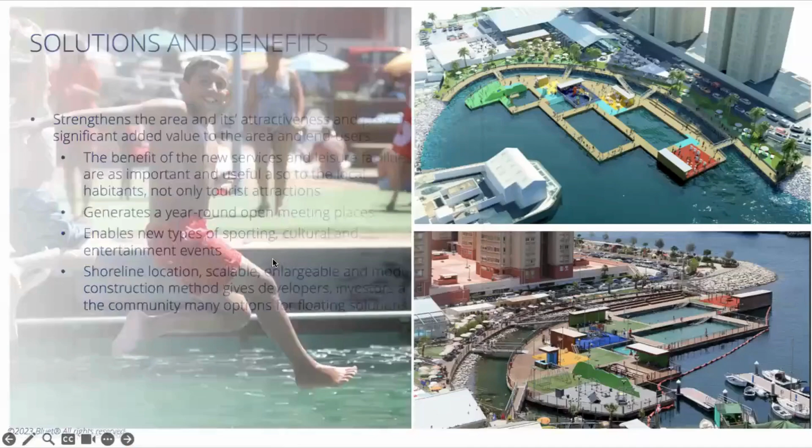Then I'm just going to show you some slides of what we have, what you can do with these floating solutions. So we have these before and after pictures of some of the cases, and also a good example of why we are actually doing this. This is where we actually started from.

This is a case from Gibraltar - a floating pavilion which Marine Tech already did in 2013 and 2014. There was a very bad, rocky shoreline which was pretty much dangerous for swimming. Nowadays it was created into a floating swimming arena with outdoor gyms and everything. This created a safe swimming spot, but also a new leisure facility for people and tourists, and you can see the happy face of a swimmer, a user. So this is a good example of a totally new kind of waterfront with a floating solution.

This is also a case in Finland, in Helsinki, next to one of the busiest harbors in the Nordic areas, probably one of the busiest also in Europe. There's also going to be a housing area, already a new development area, with a lot of housing coming, and then a multi-use concept on land, like 5,000 square meters of hotels and offices. We're also going to build a floating spa here with pools, restaurants and saunas on the waterfront, with a beach which the city is building over there.

And this is the same thing, not enough space on land to build this. Not an urban area, but a really good example of how it can be changed.

This is a project in Iceland. On the top right, you can see a very silent, natural-based location with a small inland lake. And this is what it changed to. They have a spa building on land, and then two thermal floating pools on the water. Totally different experience than just the traditional spa on land, but this has brought a totally unique spot to this area as well.

Then one of our latest projects, Lake Como, what we did over here was replace the old pool. They had an old floating pool over there, and now we have replaced it with a new one. This is the largest floating infinity pool in the whole world.

So you can also see what could have been done, and also the same thing could not have been done on the land at all, because they have a spa beneath the land, like in the basement. So there is no space on land to build this, and that is also a definite reason why it has been built on water.

So just to give you some examples of what we can do with these floating solutions. Then, why are we talking about this? So now touching a little bit on what Bluet does - we are a company who concentrates only and 100% on floating construction, and like Stefan said, we have been founded in 2016. We have our own product concepts, which are floating pools and floating infrastructure, and that's actually how we expanded from the floating pool also to the spa and wellness solution. We don't do anything else, we do the floating construction.

That's why we are so uniquely specified to this construction. And here's, for example, the Helsinki Allas. It's not just about the pools - there's also 1,600 square meters on land. There's the infrastructure part, and we have several infrastructure solutions we deliver, always designed project-specific.

We also bring everything we bring to the land, we bring to the water. So it's not just about the pontoon, it's also all the infra needs - water, sewages, electricity, anchoring. And the foundation is something you should never skip, because when you have a good foundation, then you have a good project and a safe and sound house on water.

And on the right you have a good example of a combination - there's the pools, the infrastructure with a restaurant, saunas, spa, and a wellness concept. So we actually bring everything together in one with our collaborators.

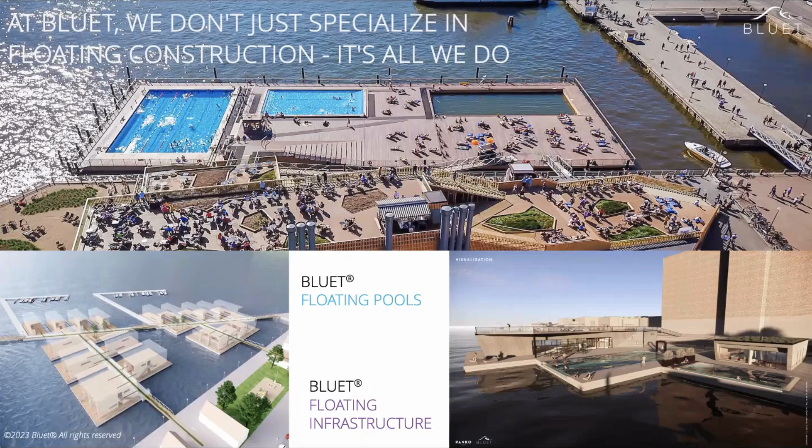One important thing to mention is that we're not a company who builds the buildings, because there are several companies who can do that. This is how we collaborate with other companies - we don't compete with the architects, we don't compete with the real estate developers, nor MEP designers or project managers, nor house manufacturers. We collaborate with them because there's so much knowledge in the world that we don't have to invent the wheel again. So we bring our niche knowledge to these areas and collaborate with several different kinds of companies around the world.

And if there are any questions in between and you want to stop me for a while, just let me know.

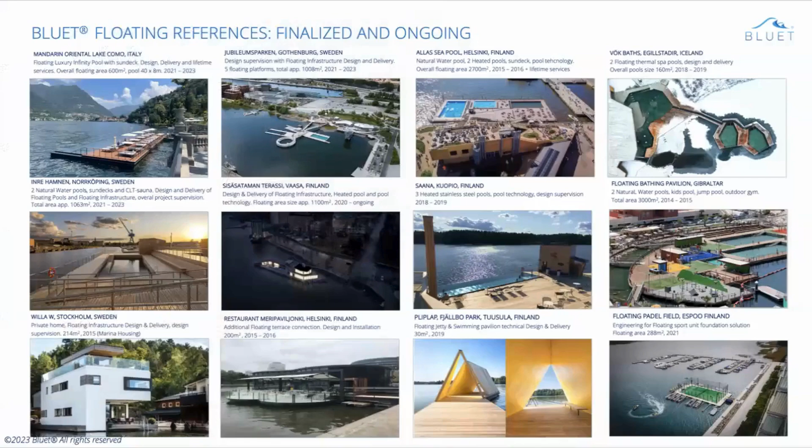Here's some of the references. And like I said before, we are a company who designs and delivers our own products, so basically we run the whole project. We can design and engineer the whole project from beginning to end, from the zero level below. So like I said, we're not building the houses, but we supervise the house designs. We work with the local designers, local architects, local technical designers to bring our own niche know-how to the project.

Here's some of the pool projects, housing projects, floating decks, floating sports fields. Our main areas we have worked on are the Nordic countries and Europe, but we now also have projects coming up from the US area, starting projects from the Middle East. So we are expanding, and hopefully soon also having projects in Singapore too.

Wonderful. May I actually interrupt you, as you mentioned, because we have 3 questions in chat. I will quickly read the first one - I mean, you can also read if you want to. What are typically the points of friction with decision makers to install floating structures? How do you convince the decision makers and overcome these?

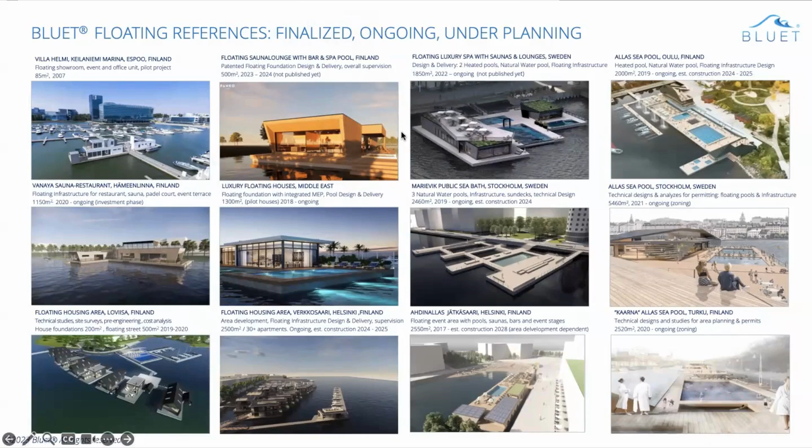Some more references over here, maybe also about the spa projects. We have spa projects, like I said, where the pool is just one part of the overall solution. For example, these Swedish projects here, we have 3 pools, but the main thing is that we are also working with the spas - there's a spa, a sauna lounge, a private sauna, and a hotel on the shoreline. This is a company called Bongo we work with on these spa solutions. Just wanted to show you these multiple options.

This is a public pool project in Sweden. One key issue here is not just the new structures of the pools, but we also used an old pool - we renovated and reused it. So that's something we can also do.

The ecological issues and the reuse of old materials are very, very important to us as well.

This is also a natural water pool, which is what I was just saying regarding Jean Cesar's question - these natural water pools are something we truly emphasize. There are different kinds of natural water pools. You can have non-filter solutions, which work well when you have good water quality around the area - that's an easier thing to do. But when you have bad water quality around, we can filter the water and create swimming facilities in areas where otherwise you couldn't swim, even if there's a lot of traffic around or something like that. That's a good example of that.

Basically, about the process - we wish to come in at an early stage so that we can save the client's money, and, as Jean Cesar asked, study properly. Because when we have a moving element beneath us, it's really important to study everything properly and know all the water site conditions, local rules and regulations, because even though there are a lot of general rules and regulations globally, swimming arena regulations or even building regulations vary a lot. So the sooner we can get into the project, the sooner we can offer more knowledge and support the investment.

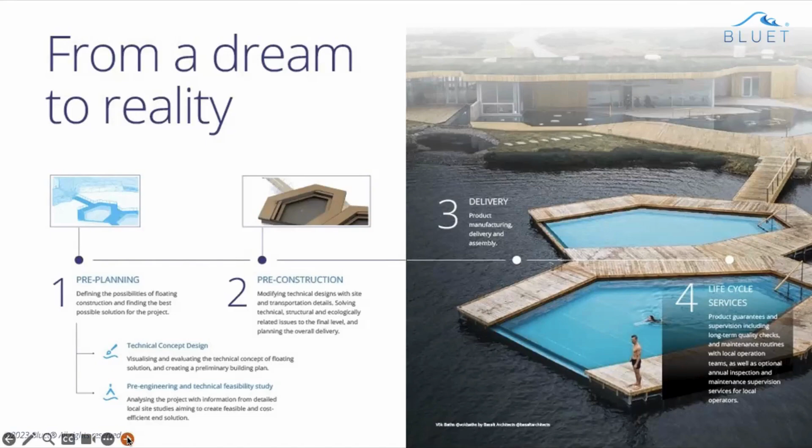One of the most important things is that we also offer life cycle services. We offer all the maintenance manuals and training for the local staff and the local maintenance company, and then we stay there after the handover to supervise the local company and help them maintain the new solution. Of course there are a lot of different issues to maintain in a floating structure compared to having a swimming pool on land.

Okay, then I know everyone's always interested in the technology, how we do this. So I picked, like I said in the beginning, 3 project examples here, just to give you a short description of what kind of technology we have used, how we have built them.

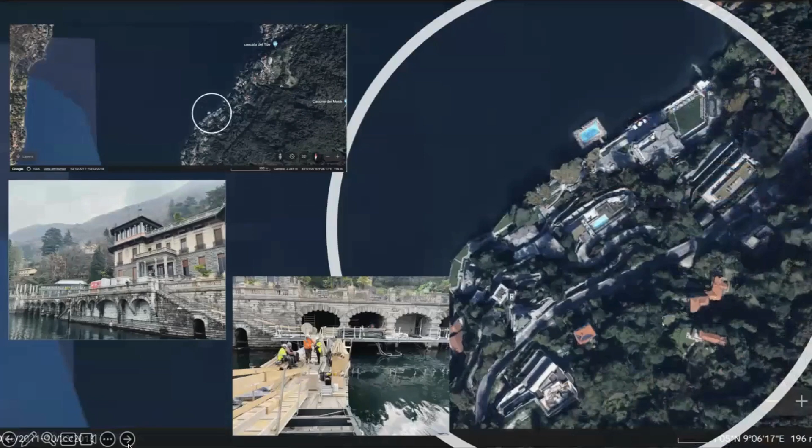Lake Como floating pool is a customized heated floating pool, and this is the location - you can see the lack of land area at the hotel unit here. What's special in this pool is it has a 40-meter infinity edge, never done before as a floating structure. The total area is 600 square meters, including the pool and the sun deck, 40 by 15 total. There was a very famous architecture company involved, Herzog de Meuron, who did the architectural design.

There was also the local contracting team who partnered up for the anchoring, and a company who did the stone cladding for the steel structures. We manufactured it in Finland and then transferred it there by trucks. It was a 2-year project - basically 1 year for design, 1 year for manufacturing and installation works.

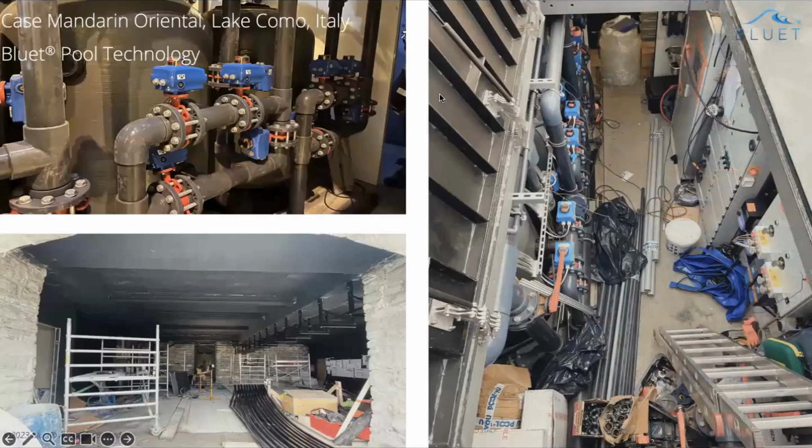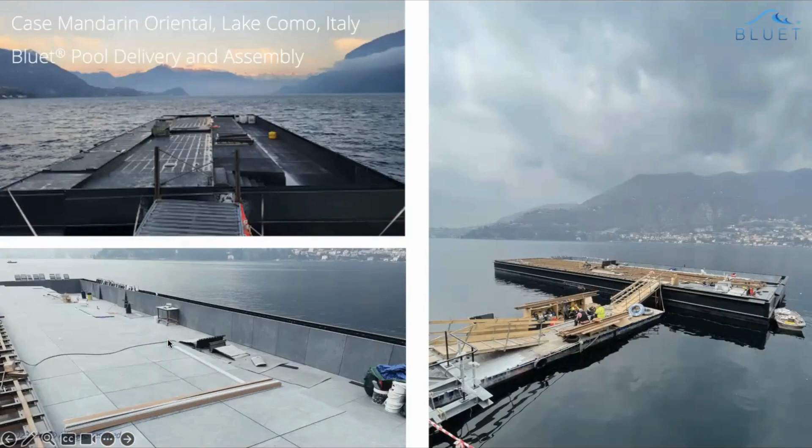What's special about it is that there's 3 underwater containers. It's a catamaran structure made of 13 steel containers, and 3 of those containers include technology. One is the pool technology, and then 2 are storage facilities. We have lifts over there, so you can use them for storing sunbeds and umbrellas underwater.

It was built in one place. All the modules were installed on water, and then it was towed around the lake to the final location where all the work was finalized with the local team. Here you can see the stone cladding coming up, and this is how it looks at the end.

So everything over here, when Bluet starts working on a project like this, we always start with standard solutions, but we often have to customize, and this was pretty much a customized project in every aspect. We also have to take transportation into consideration from the beginning, so we get the cost effectiveness to the best level.

A different pool project, more customized, but also has some standard elements. This is also one of a kind. It has 3 pools in one, so this is a hybrid solution combining a natural water pool, a heated pool, a children's pool, and a barge pool.

There's also a combination of unique foundation structures. We have concrete pontoons, and then we have steel structures. The location is also unique, as you can see, heart of the city, so it couldn't be totally built over here. So the barge was towed in from another location.

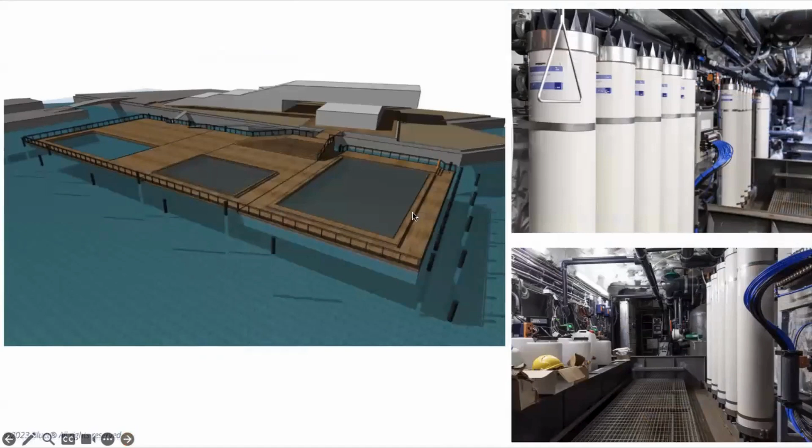Here you can see the difference in the structures. The end structure here is the barge structure, which was built in a shipyard. Nowadays we have a new solution for that too, because if you're not in a sea location where you can tow the solution through the sea, we can, like the Lake Como one, build it from modules and install it on the water separately. But this one was towed by sea.

Inside the barge you have the technical space, full pool technology inside, and then you can also walk around the pool. The second platform is made of concrete, with one heated pool on it. Then you have only a concrete deck as additional space. And then the last one, which is also a concrete deck, with the natural water pool space there.

So here are some site pictures, you can see how that's been built. The natural water pool has also been built from modular units, and then the barge was towed to the location and connected to the whole site.

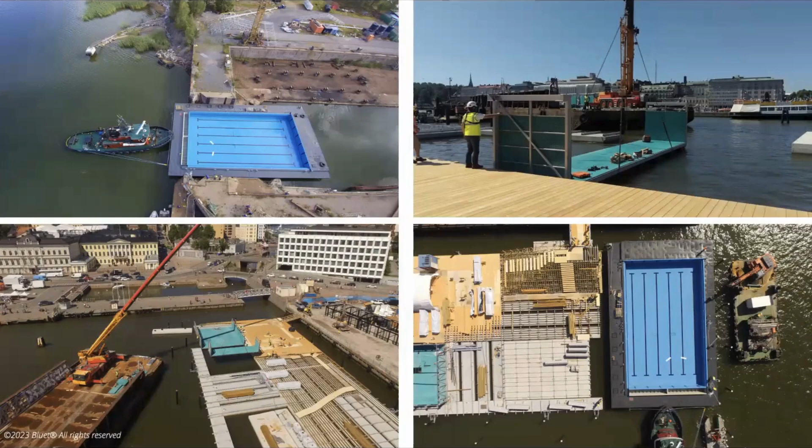And this is how you can see some renovation updates we've done over here. They wanted additional sauna facilities. So what we did, about a year and a half ago, was make the natural water pool a bit smaller, and then built new infrastructure for the new saunas on the left bottom side. You can see the floating saunas there. So we built new infrastructure so they could use the deck space for the new saunas.

There's one question. Yeah, go ahead, interrupt. There are two. Yeah, okay.

What maintenance procedures are required to ensure the longevity of the structure? Good question, Marco, thank you for that. There's a difference if you have a steel structure, concrete structure, or pool technology, and like I said, we deliver all the maintenance manuals. So there are different kinds. If you have a concrete pontoon foundation, they are pretty maintenance free, they don't need much maintenance.

For example, if you have a very icy site or rough conditions because of waves, we recommend that the anchorings and connections are checked once a year after the ice melts.

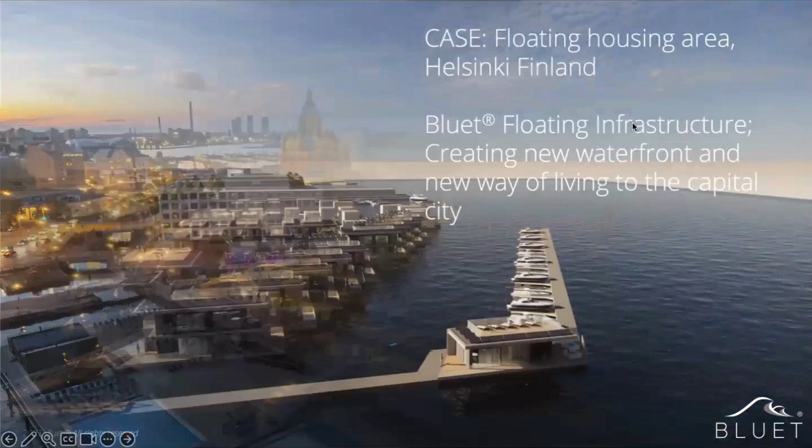Okay, thank you. Now, this infrastructure housing case in Helsinki - I wanted to bring this up even though it's not a spa and wellness case, because there's a combination here, and you can see a marina pier up front. That's because we need a wave attenuator there to secure the site. So the combination here is marina facilities combined with housing facilities together. This can definitely also be done with a hotel or other accommodation units, spas, wellnesses, or restaurants.

One important key thing is that you have to have access by boat. Boaters want to have access to reach these facilities. Here, where we have the marina, there's also a clubhouse. The clubhouse can be used by tourists and people not living there, but also, how it's been combined here, the inhabitants who actually buy a house there can use this facility for gatherings, saunas, and renting sports facilities. So it's definitely important to think not just about housing, but about community, how everything can be joined together.

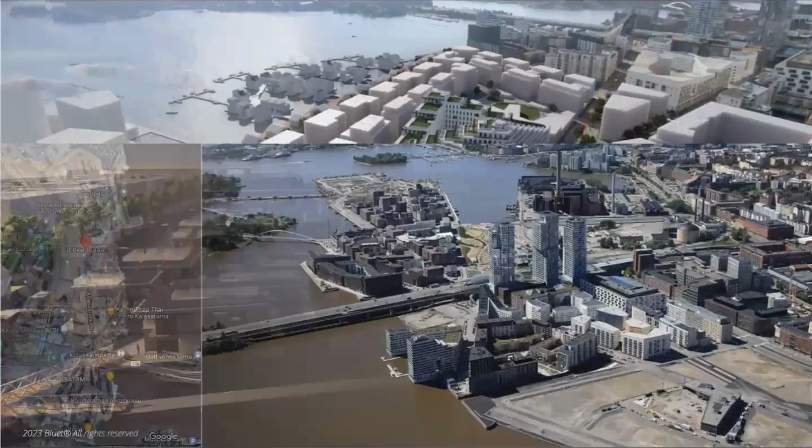This is also the location - you can see it's a totally new development area in Helsinki. There's going to be a lot of apartment buildings on water, and this is going to be, I would say, the most interesting housing project in Finland and the Nordic countries for a while. We are really looking forward to it.

It has been a very, very long project. As we all know, these projects take a long time. There's a lot to housing projects because the permitting takes a while, with environmental permits and everything. Here, the case was mainly about the land construction, the land area. It was a very big project because there was polluted land area which they actually had to change entirely.

So we have been waiting for the time to actually get access over there. Because you cannot build a floating area if you don't have access - you have to have the shorelines and the quay lines, the quays ready anyway. That's one important thing: floating construction always needs some space on land, so you pretty much cannot have a totally independent solution.

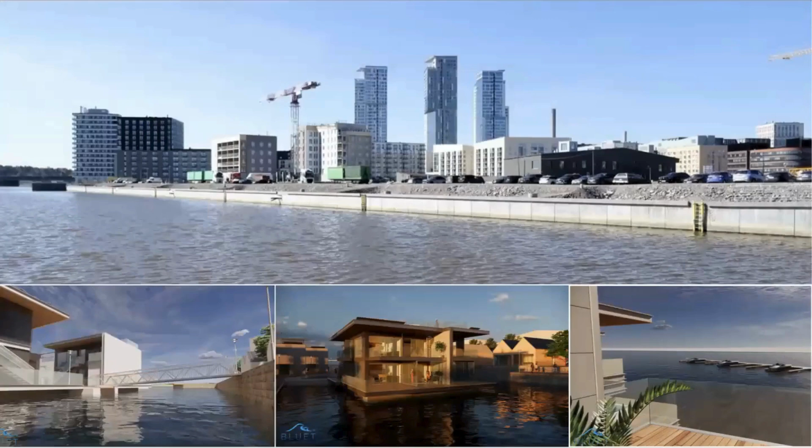Parking spaces, gangways, walkways, and everything like that. Here's just an image of the site. Now there's already houses being built over there, and we hope we're going to get this thing running by the end of this year. It's a fairly big project - 40 houses in total, but we are covering about half of it, which means there's actually 32 apartments, because some of these houses have 2, 3, or even 4 apartments in one unit.

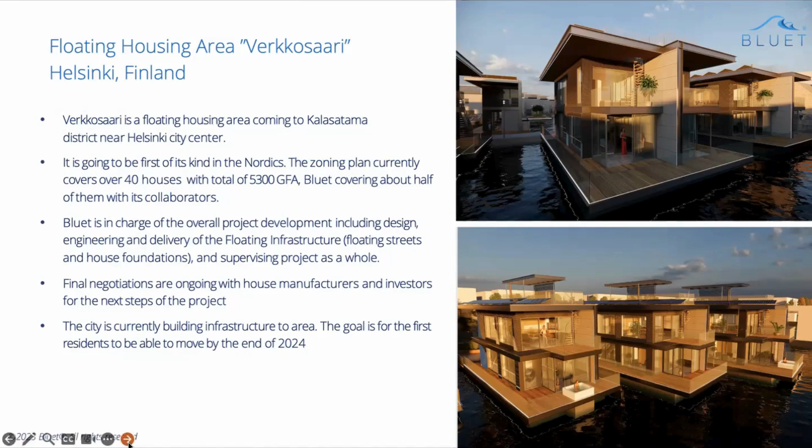This is very important also to the city. We know the city has been very helpful with this. The permitting is difficult because even in Finland, the authorities don't know what they're actually giving permits to, since it's a new area, the floating construction. We've now been getting examples of what we can take elsewhere, how it's been done here and how it can be done elsewhere, because in several areas there's no permitting procedure for floating construction. We've been learning a lot from this, and hopefully can give examples to other areas for solving both technical and permitting issues globally.

Here's some examples of the sites. Modular construction is very important when you do a floating housing project, or even a restaurant, spa, hotel accommodation, whatever, because you have a moving element below. It's really important to use modular construction and prefabricated structures so the site is much easier to handle, and the balancing of the whole infrastructure is a lot easier during construction.

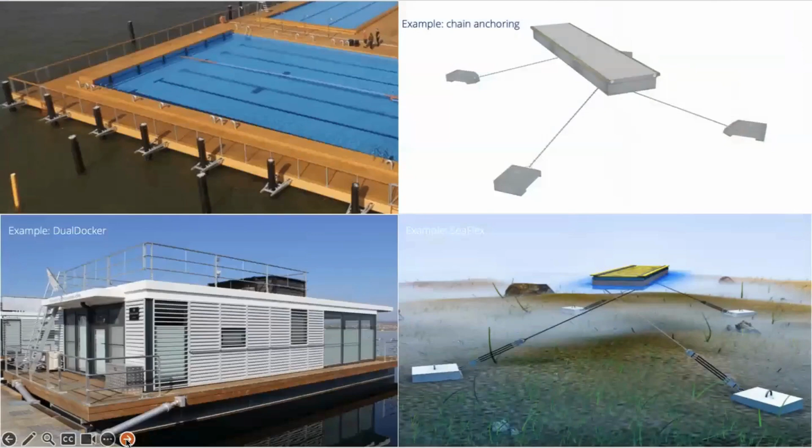Anchoring, like I said in the beginning, we analyze the project so we're not saying it's going to be chain anchoring. The waterside study can say it's a DualDocker chain combination, or pile anchoring, or SeaFlex. There are a lot of options, and they can also be a hybrid solution. So this we also study thoroughly.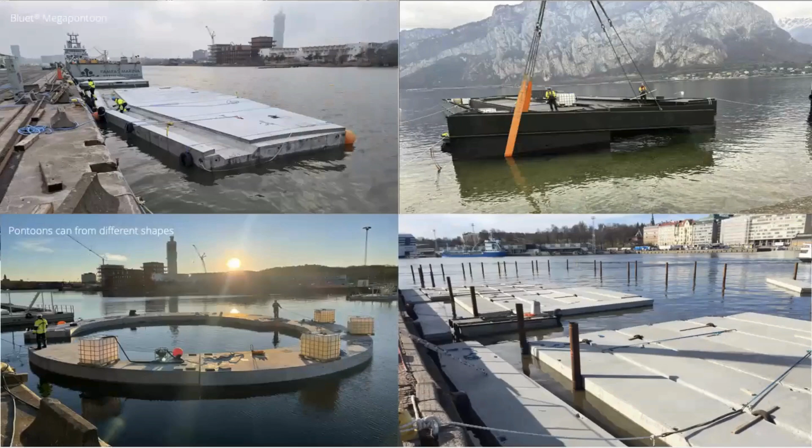We bring the bridges, the infrastructure, what we need to the project, and there are a lot of options for these facilities. But basically everything has to be brought in, what we need on land. We use mega pontoon structures, steel structures, modular concrete structures, and we can also make pontoons with different shapes.

Under housing, we recommend concrete because it's most maintenance free. We use steel when we need different shapes, and when conditions are rougher—for example, in the Allas Seapool case, the barge structure is actually covering the concrete structures from the waves.

Charles is also asking a question here: has any of these floating structures received certification from classification societies? If not, how are these being insured?

Very good question. We've been asked in projects, for example, for CE certificates. We don't have them because there's no harmonized standard for floating construction. We are strongly aiming to do that, and we wish we could join forces with research institutes and other parties to create this, because when we get harmonized standards and certificates, that's when we're going to get a lot more projects. And going back to Jean Caesar's question, this is also something that can more actually guarantee investors that the projects are truly studied and analyzed.

We use a research center called VTT in Finland, which is a really big governmental-owned research and development institute. We go to tank tests, for example, to test this, because we don't have the certificates. We truly have to prove to the client that things have been tested. We do the calculations, and we even might do a scale model test so we can prove it, because we don't have these certifications.

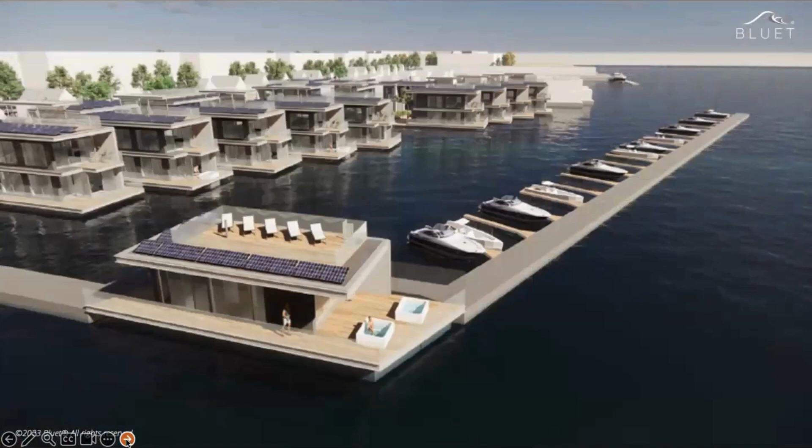So this is something we need to emphasize and bring actual proof to the client several times in these projects. I think we could also benefit from joining forces, because we know the bad things too—we've learned from mistakes. This always needs to be emphasized, that it's been a learning curve. I'd say we've learned a lot over the years, and I think it's really important to share this information with other parties who design, study and analyze these projects, so we can bring all this knowledge together.

Okay, thank you, but that was pretty much running that up. I'm really glad to answer questions and tell you more about these, whatever you're interested in.

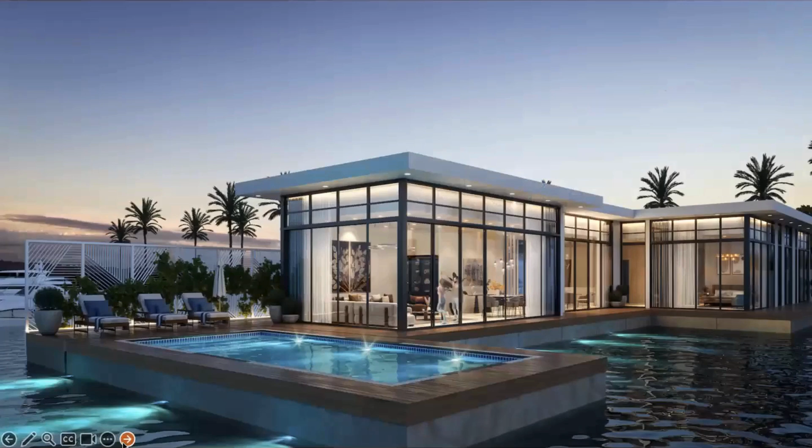One question I have is about the potential use in areas that are also used for floating solar power generation, water sports areas, and so on. How do you actually make these structures very accident-proof? Is this more about keeping distance, or can you also work on that in terms of materials? And a sub question: what would you actually do in an area with sharks? I presume you would fence off the area, as is usually the case, but is there also something that makes the structure itself shark-proof?

I'll take the shark question first, because that was a good one. This is where I'm talking about these natural water pools. The shark area is truly the thing where if you have a shark area, you have to have a safe swimming zone, and this is how we can create it, because the swimming facilities have walls and a bottom, so you have a truly safe area to swim in. It also keeps all the other stuff out, because it's not just a hole in the water, it's truly having walls, a bottom, and a fixed structure.

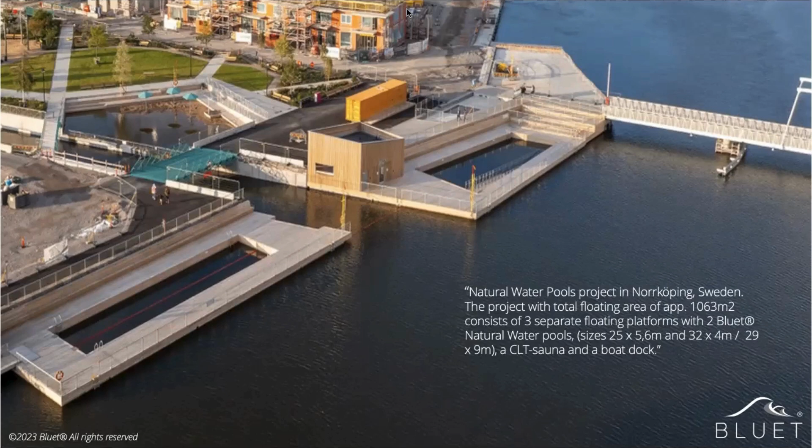But the water flows back and forth. If the water is clean enough, we just use the water - it has small holes in it, so water goes in and out. But if the water needs cleaning, it has the inner liner and then the filtering system. That's definitely done. Was the other question about being accident-proof?

Yeah, okay. I'm going to show you another example about that, because that was also a good question. One of the reasons why Allas Sea Pool made these new saunas was... hang on, where is it? Here.

There was, we have a lot of projects where a marina or harbor is nearby, and one port authority actually asked us, how can you prevent it if the captain is drunk? How can you prevent them from running over the floating pool? Well, if you have a Queen Elizabeth, which is like 300 meters long, you just have to say nothing - you just have to have alarms and people have to get out, because if that comes onto the shoreline, it's going to break the shoreline as well.